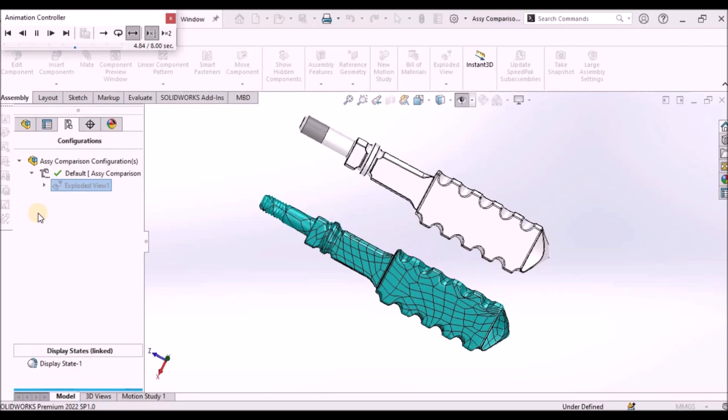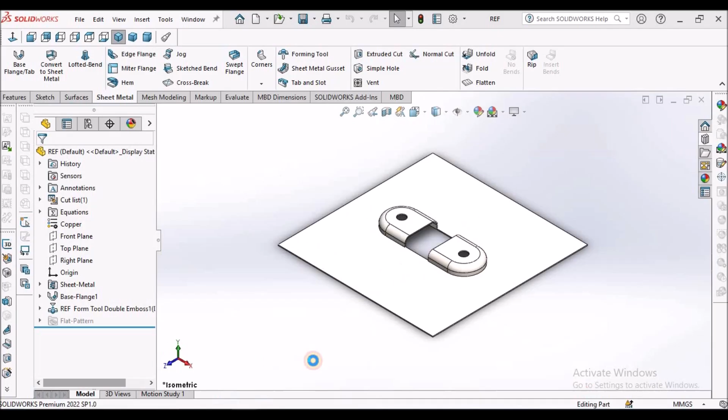Hi, today I am going to explain about double emboss. On the left side you can see the component, on the right side the form tool. So this is the component I am going to create, and this is the form tool.

Let's start now. I've taken a new SolidWorks part file, selected the top plane, go to sketch, draw a center point rectangle, select these two lines and apply an equal constraint. This is 20.

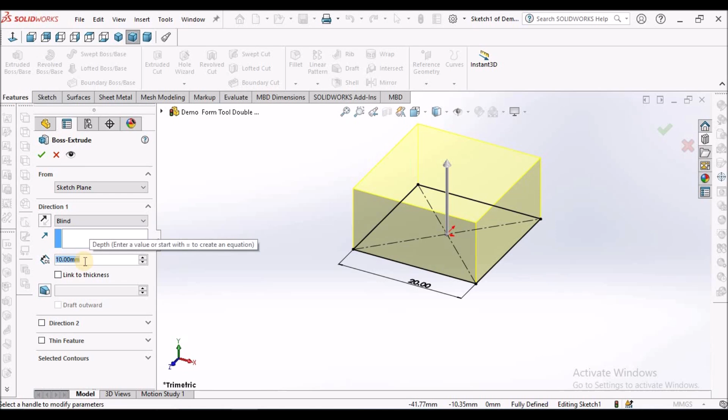Create an extruded boss. You can assign any value, so I have taken 3 mm.

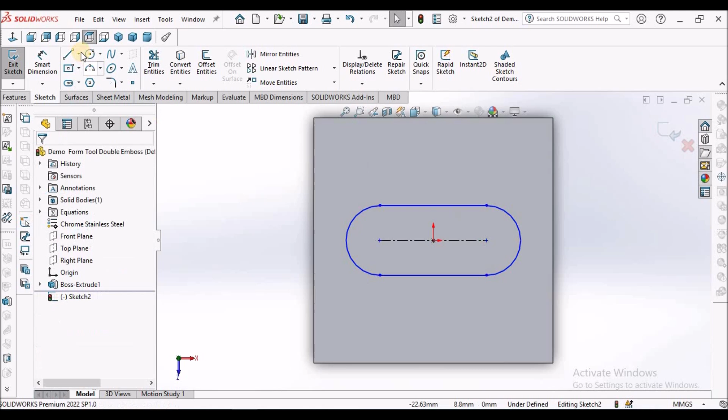Now select this face, go to sketch, select this center point, straight slot. So this is 8 mm, and this is 4.

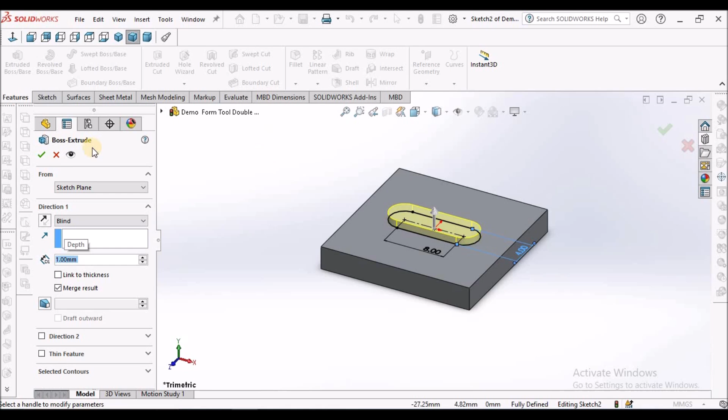Go to feature, select extruded boss, taken 1 mm height. Now I am going to apply fillet.

So this is 0.5 mm. Select this edge and say OK.

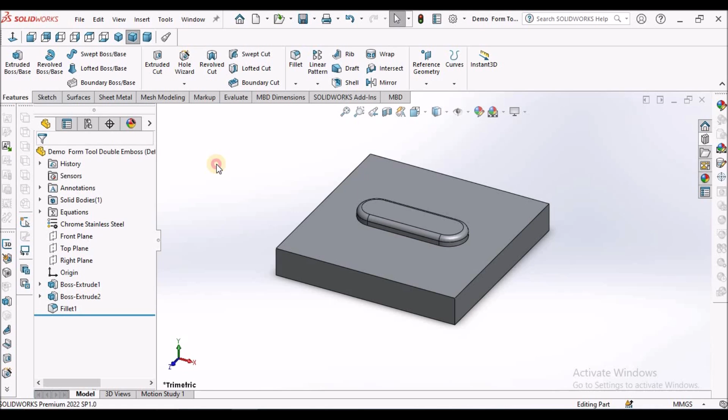Now I am going to create one extruded boss. Select this face, go to sketch, keep it in wireframe, select this edge, convert entity, and select this edge, convert entity.

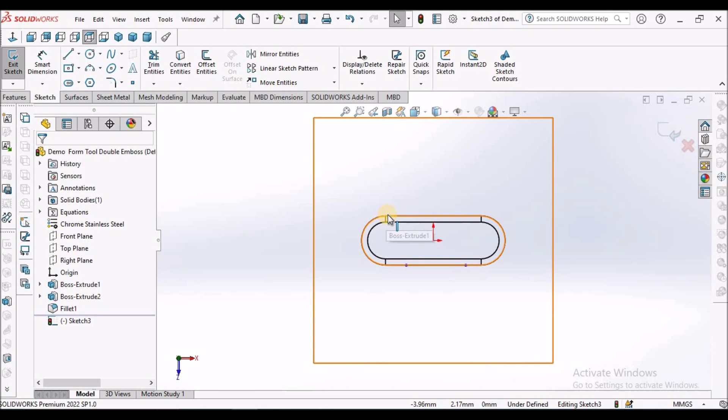Just move it a little bit inside. So I am going to create one rectangle joining all 4 points, and I have to move this line a little bit inside. See.

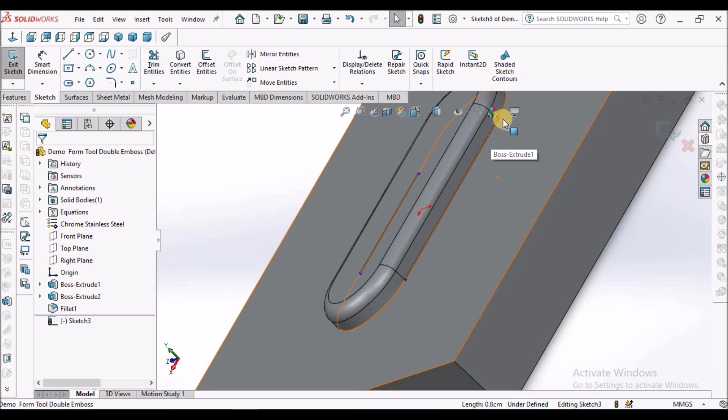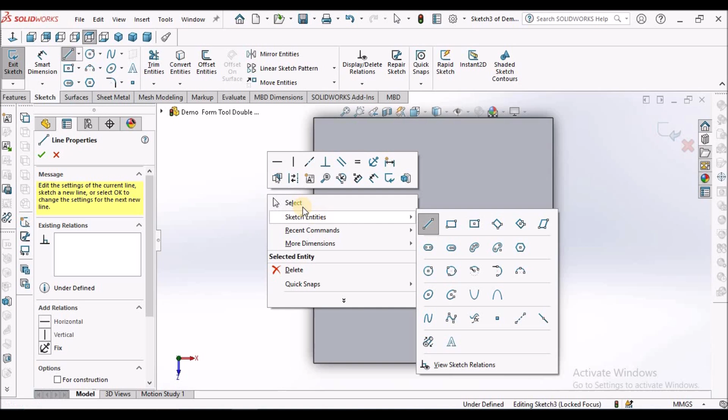So we have to convert this, move this line inside and keep it normal. Now join the 4 points and make it vertical.

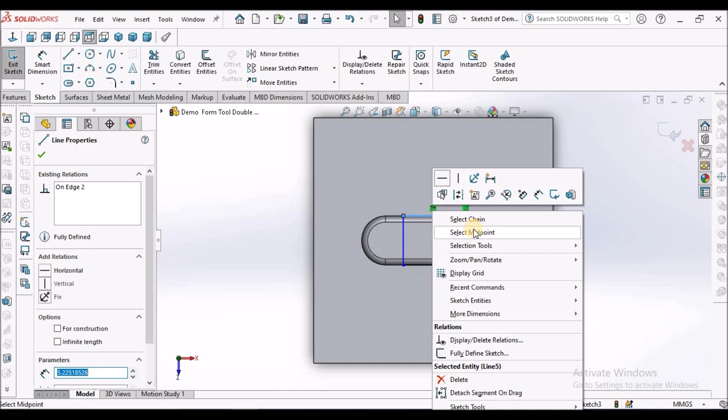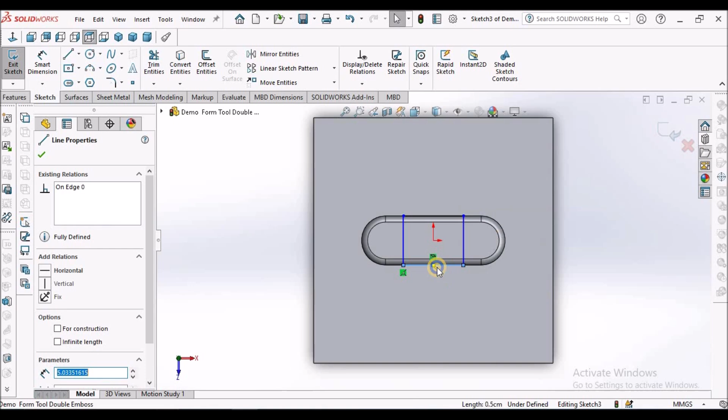See here. Now select this line, right click, select midpoint, select this origin, right click, midpoint, or select directly the midpoint. We have to make it vertical so that it is exactly at the center. Select the midpoint, origin, and make it vertical.

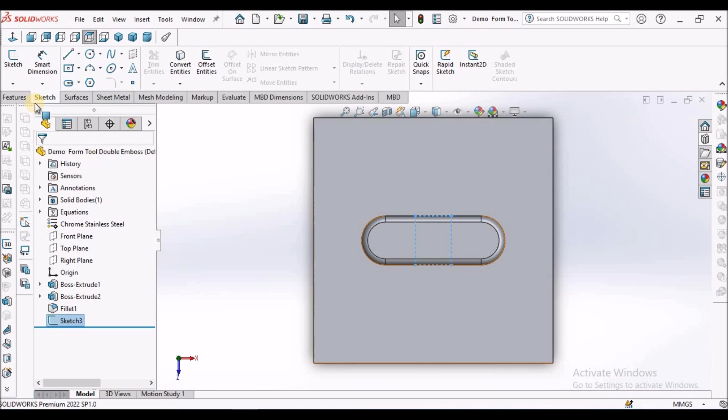Now make this distance 3 mm and say OK. Now create an extruded boss. This is 2 mm. We have to merge the results - this is important, see here.

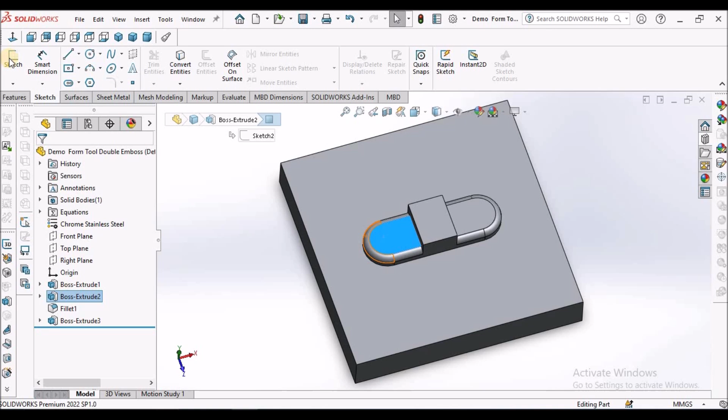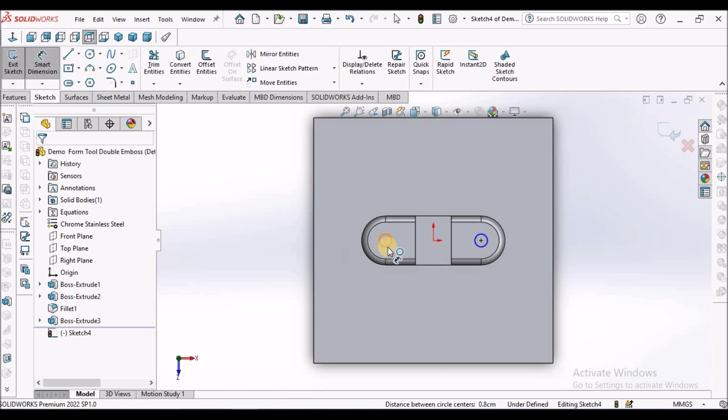Now select this face, go to sketch, draw one circle exactly at the center. Simply select these two circles and make them equal, and the diameter is 1 mm. So feature, this is 1 mm.

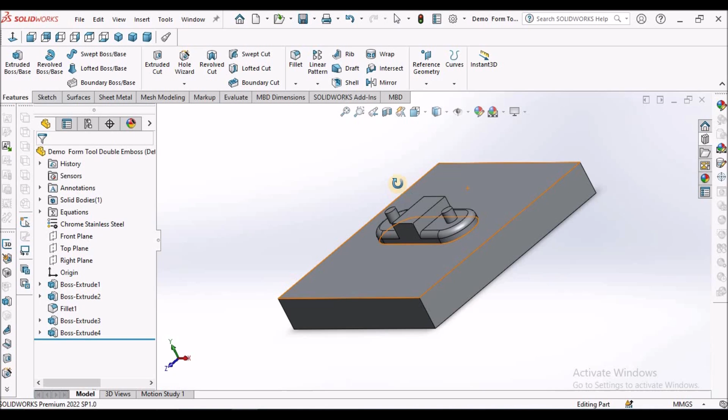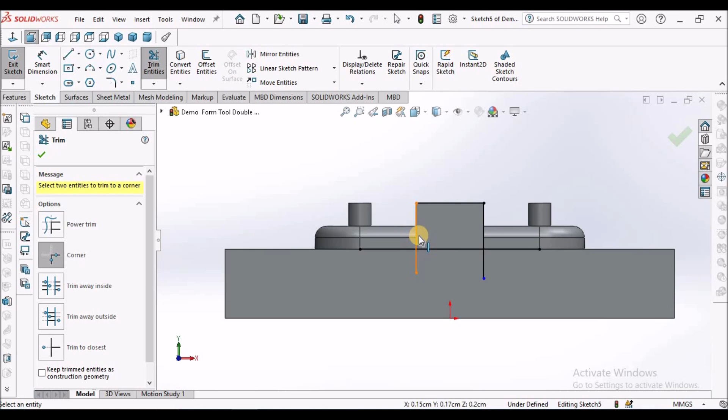Now select this face, create a sketch. Select this edge, convert entity, this edge, convert entity, and the top also we have to select convert entity and simply drag downward and select the trim tool. So corner trim, select these two lines. Now this becomes a closed rectangular loop.

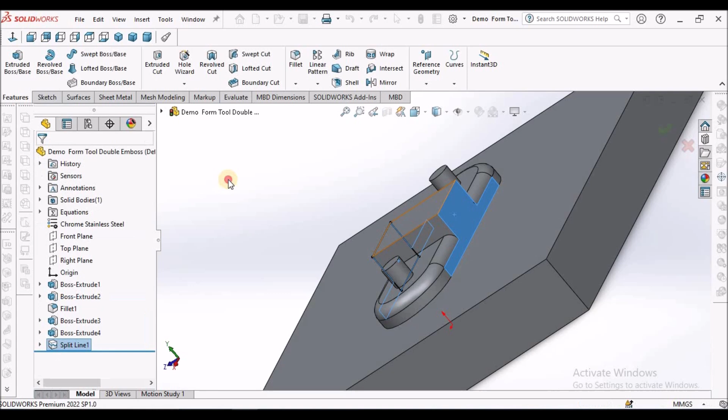Now we have to go to features, select split line, select this face and this face. See here, we can see different surfaces on both sides.

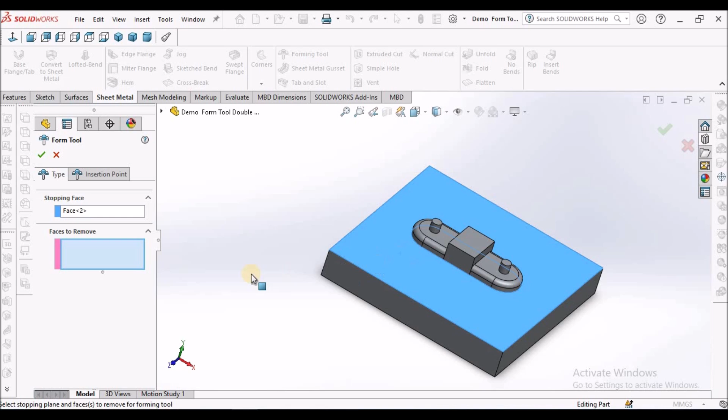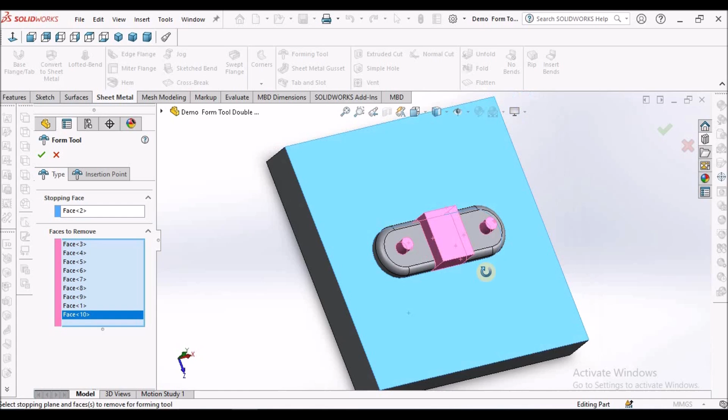Now we have to go to sheet metal, select the forming tool. So for the face, we need to select this top face, and the materials to be removed. Select this circle, this one, this top face, side one, cylindrical face, this one, and the other side. So we have to select all the faces to remove and say OK.

See, we can save this file. We can use save as or pack and go. So we have to select the folder. In forming tools, we can select any folder - so this is the one I have saved it to.

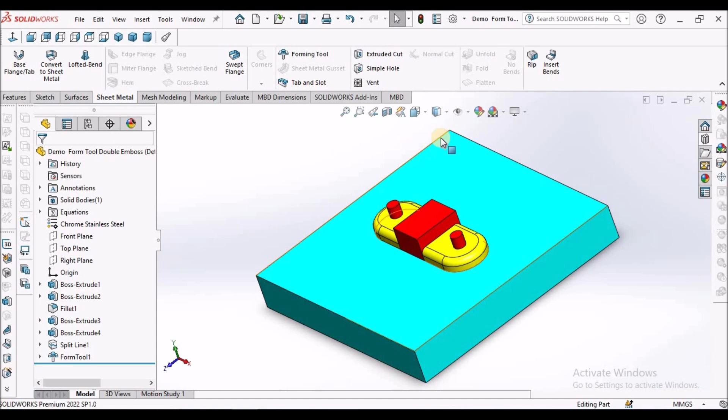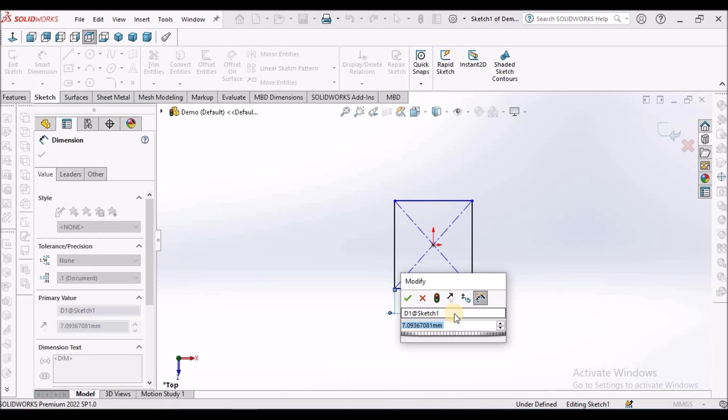Now I am going to create one flat sheet. Select the top plane, go to sketch, select center point rectangle. I can assign the same value, this is 20 mm, and select these two lines, make it equal, and go to sheet metal, base flange, 0.1 and K factor is 0.45.

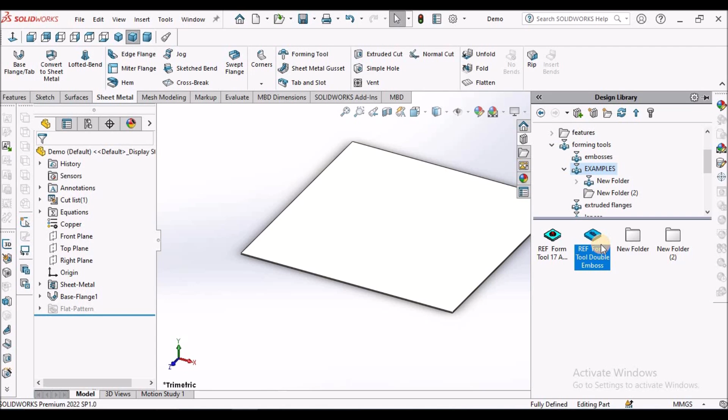So after creating this component, we have already saved this file in the forming tool folder. Simply drag and drop. We have to see the orientation - it is downward, so we have to flip this direction and place it exactly at the center.

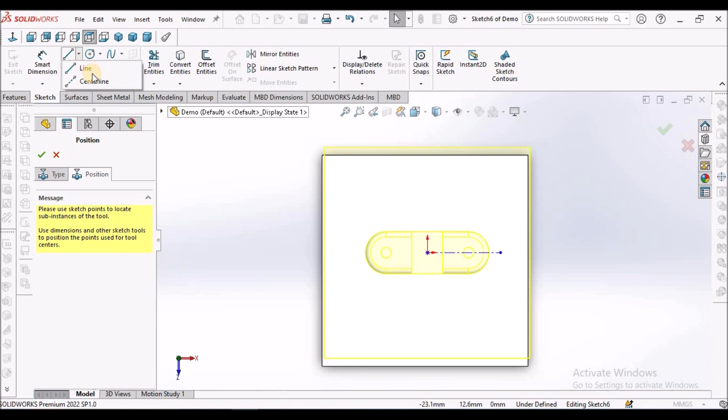So draw one center line diagonally, joining these two corners, and move this point exactly to the midpoint, and say OK. See here.

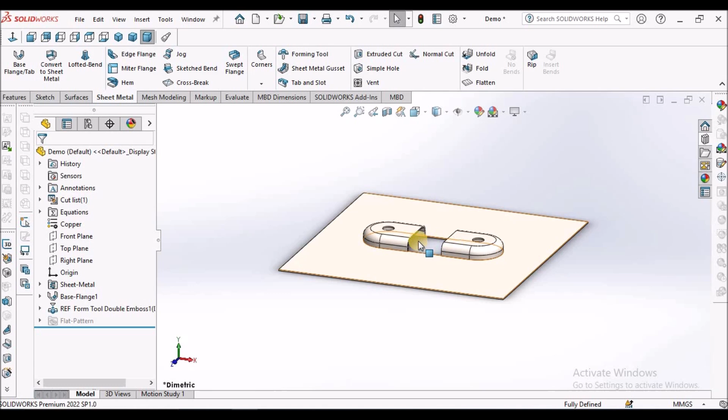So this is how we create these kind of components. Thanks for watching.